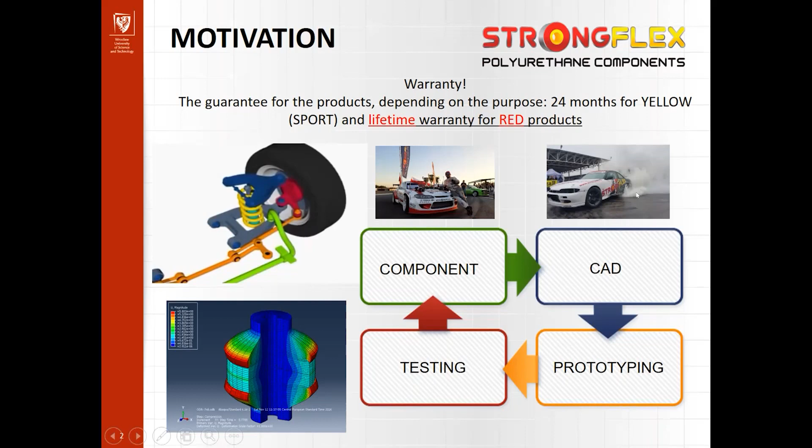The company sells a lot of parts offered in different hardness configurations, let's say 80 Shore A scale or 90 Shore A scale for racing, or maybe many other sport purposes. But let me focus on the main research, I mean the fatigue. And of course, the company was extremely interested in modeling and analysis of the fatigue lifetime of the components, as was underlined at the morning keynote lectures.

The way from the material to component and fatigue lifetime analysis is quite long. So we used, in our case, a specially designed diabolo type of specimen, a volumetric specimen, and also, not presented here due to time limitations, a lot of work connected with the identification of the constitutive model. In this case, it was the Ogden model. It was verified by 3 types of specimens: flat specimens from the tensile test, pure shear specimens, and also volumetric specimens like this. And some results are presented here regarding the data fitting to the numerical and experimental results.

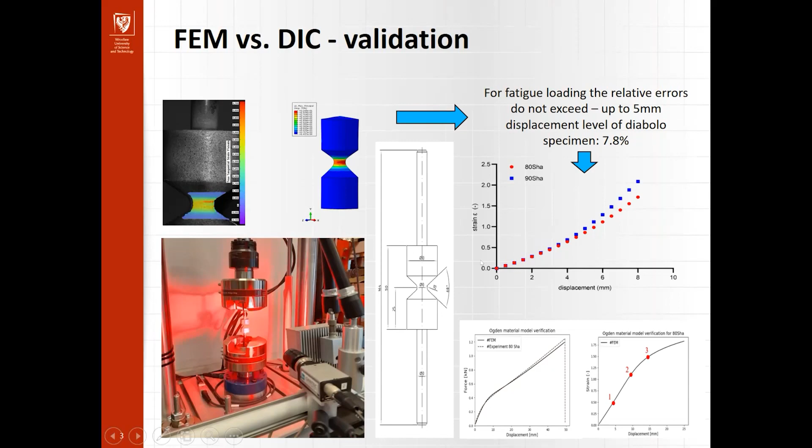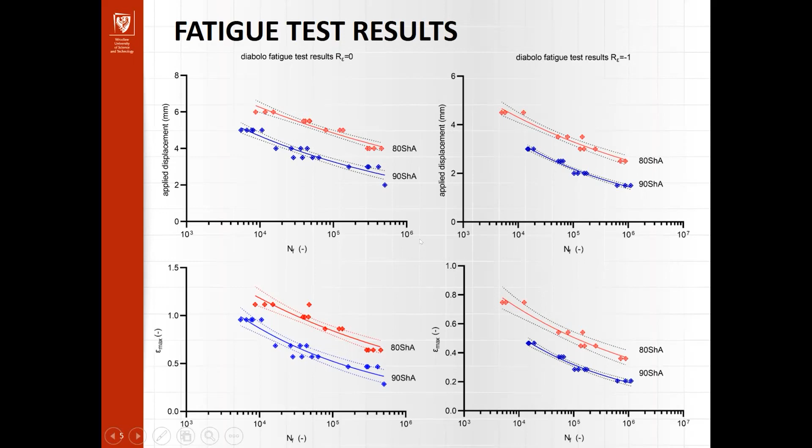All experimental tests of the material were done in the MTS Bionix system using displacement control mode. And of course, we received an excellent response from the material in the sense of the applied displacement and fatigue lifetime, and we can describe it in the strain approach for strain ratio, in this case 0 or -1.

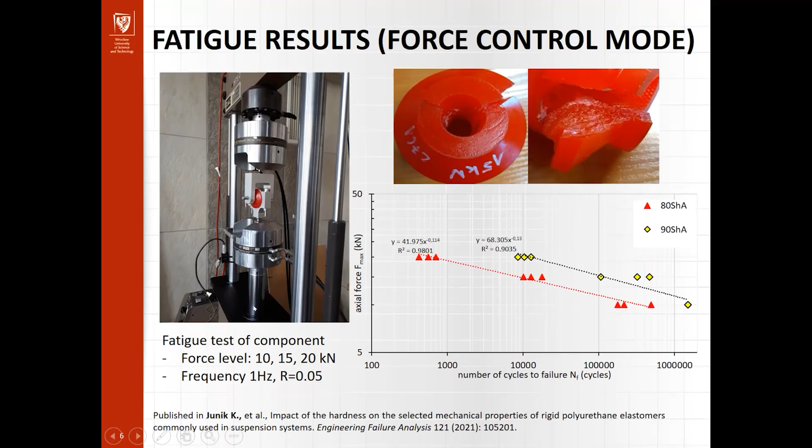And finally, we made some experiments connected with the components like the bushing system, commonly used in some vehicle configurations. We tested, in this case, under force controlled mode with the frequency 1 Hertz. Stress ratio, force ratio, was close to 0, 0.05. And of course, we have different types of hardnesses. And the key problem, which is of course obvious for the fatigue analysis, is how to predict the fatigue lifetime of such type of structures.

Of course, the company offered a lot of different types of components, not only for the suspension system, but also for many other purposes. And we used an Abaqus environment for modeling, of course, using our constitutive model, the Ogden model in this case. And as you can see, the very simple algorithm, the flowchart for the identification procedure, led us to the conclusion that even if we have only uniaxial fatigue test data, it is of course possible to try to predict the fatigue lifetime.

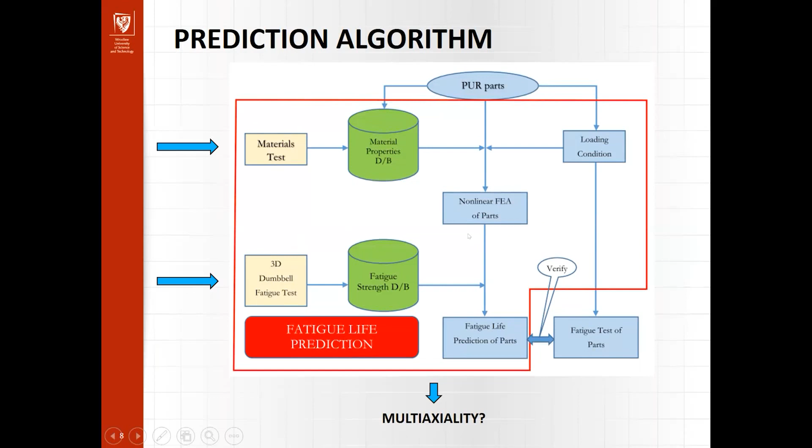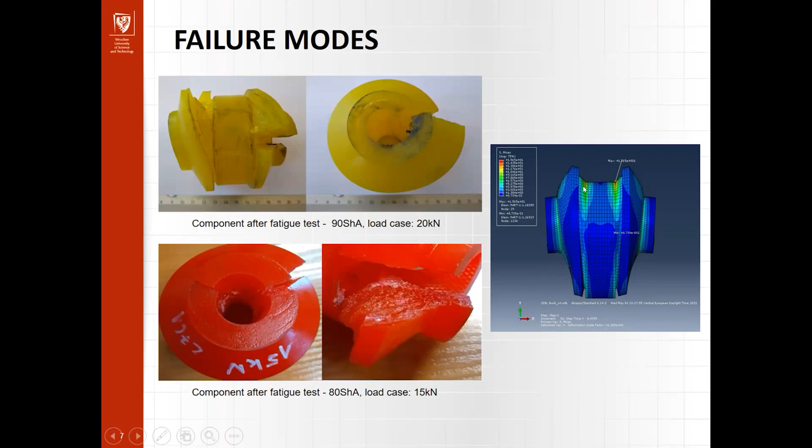However, in some cases, maybe not in this slide, but generally speaking, in some parts of the complex structure, we can observe local multiaxiality. And in this case, we tried to explore the literature regarding rubber materials and many other criteria for multiaxial fatigue. And we found 2 of them, which were successfully incorporated for some materials, like Brown-Miller or the Wang-Brown model.

In our case, as will be shown, a small modification to the Wang-Brown model was proposed, using the weighting factor S, which refers the maximal nominal stress to the critical rupture stress of the material.

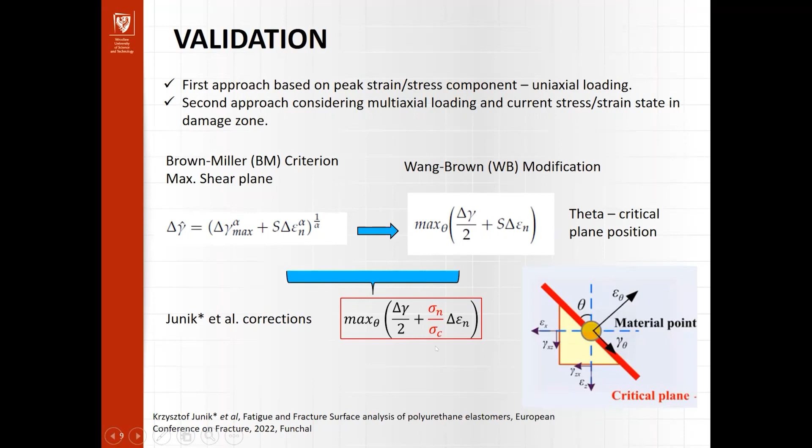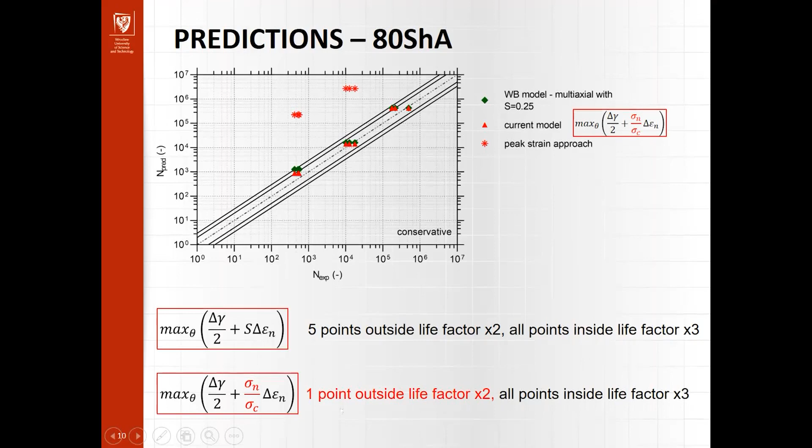And of course, for the 80 Shore A scale, we can observe the same tendency. As you can see, all points are within the safe life factor of 3. And also in the previous case, all was in the same way. And as you can see, the predictions are better.

So let me formulate some conclusions at the end of the presentation. Of course, elastomeric materials are still a challenging topic for fatigue analysis, mainly due to a lack of proper description of the fatigue models. Even if we use the well-known and well-recognized Yeoh model or maybe Ogden model or many other constitutive models for the static problems, for the fatigue problems we still need to try to convert some formulas or ideas from metallic structures. In this case, this was successful.

However, it should be noted that it is still based on the uniaxial criteria, but of course, we want to extend it using more realistic multiaxial fatigue data. And of course, it is noticeable that the stress-strain approach, due to the limited description of such type of material, is okay, but from our experience, we can formulate a different approach, which is based on energy, because it's much more suitable for such type of materials.

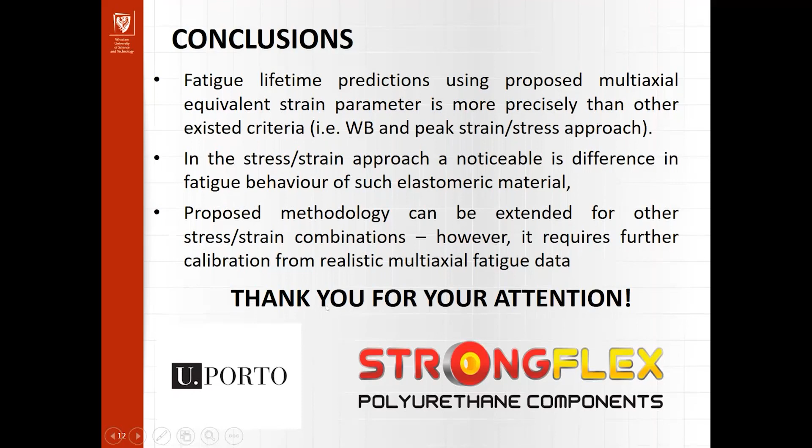And at the end of the presentation, let me open the doors for a kind of advertising, or maybe open the competition for the rights to organize the new IRAS. Let me introduce my city, Wrocław, and of course my university. We would like to put the proposal on the table to the steering committee of this conference for the organization of the third IRAS. A few words about Wrocław. Wrocław is one of the largest cities in Western Poland, with a population of about 700,000 inhabitants, plus 100,000 students. We have 12 islands linked by 100 bridges, including pedestrian ones, many built at the end of the 19th century. I have worked on topics with our colleagues from Portugal about the old bridges. They are wonderful, and of course still need engineering care.